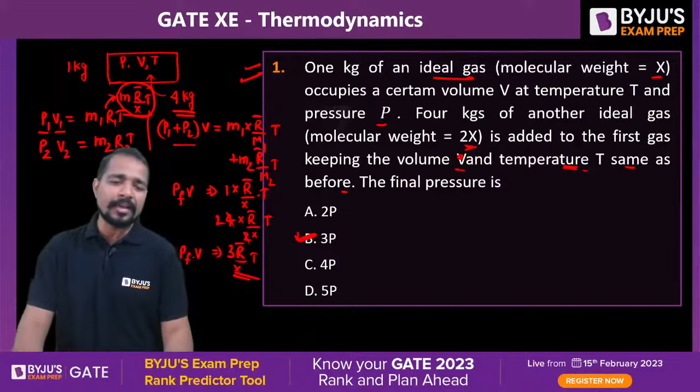So if I compare both, then P1 is this value, my dear, and P final is this value. It is clearly visible that 3P is the answer. Are you getting my point? If I compare this and this equation, we are correctly getting that P final will be exactly equal to 3 times the P initial. Answer will be 3 times the initial pressure. Yes, absolutely. Hemang, your answer is absolutely right.

Srot, Ajay, these are a little bit twisted questions. You must write the answer. Okay. After that, very easy question. Internal energy of a thermodynamic system is defined by, write the correct answer, my dear. Hemang, Ajay, Srut, fast. The internal energy U of the system is defined by, Hemang says B, that is the first law of thermodynamics. Anyone else, Srut? What is your answer, Ajay?

Yes, absolutely right. First law of thermodynamics, yes, because it defines the internal energy as a property of the system. So up to 9, these are the 1 mark questions.

In the polytropic process, described by PV raised to n is equal to constant, what if the value of n becomes 0? Then the process is known as, means slope becomes 0. Line is horizontal on PV diagram because n, means slope, is 0, my dear. So what will be the answer? Can you please tell me? Very good, very good. Yes, nice. Isobaric process, clearly visible to us.

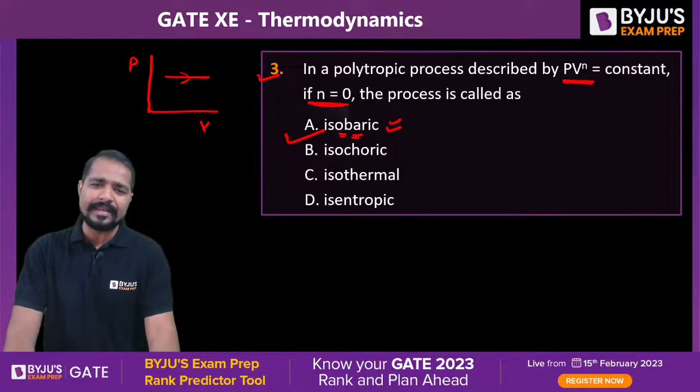If you perform a little bit better, my dear, you can get the rank under 100. Under 50, you can get the rank. Yes. Just you need to write the answer. Top 9 questions of SOM first, if you are going to attempt SOM, and top 9 questions of thermo first, because these are the 1 mark questions and very easy questions, my dear.

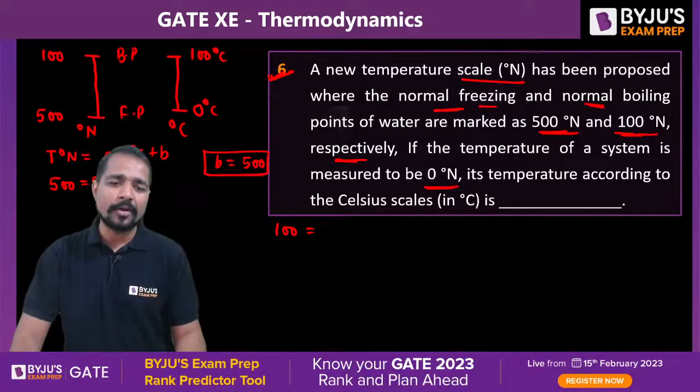We can write it like this: N = A°C + B. When this measures 500, this will measure 0, my dear. That's why the numerical value of B, I can write as 500. Absolutely right. After that, when it measures 100, this will also measure 100. That is, A is equal to minus 4. Okay. After that, I'll just substitute all the values.

Good. This is N = -4°C + 500. At this 0 value, 0 = -4°C + 500, so we can simply write that T will be equal to 125 degree centigrade. Absolutely right. Sruth, your answer is absolutely right. Hemang, right, and Ajay, your answer is also right, my dear. Next question.

Question number 7, again a 1 mark question. A thermodynamic process for a substance is represented by constant pressure on the PV diagram and constant temperature on the TS diagram. Which of the following processes are we talking about?

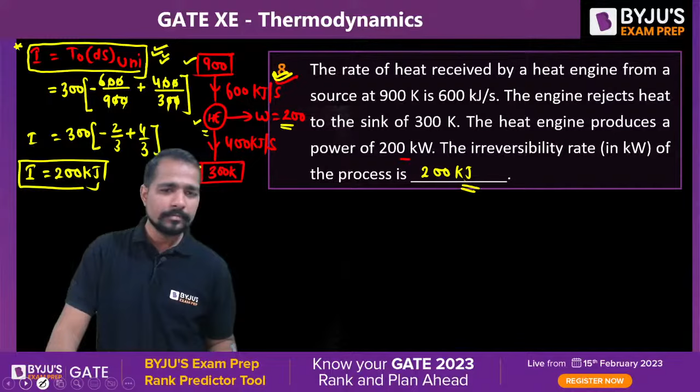Let me tell you, my dear, this time GATE mechanical gave you a little surprise. Questions were not asked from the usual topics in thermal. Generally, in IC engine at least one question is asked, and from the Rankine cycle, steam turbine or compressor, one question is asked. There was no question. Weightage was a little less than expected, but it is not going to happen in ESE. Reason: 22 questions are fixed in ESE. If 22 questions are to come, they will come. So you won't be let down, because when few questions are asked from subjects like thermal, theory of machines, strength of materials, you feel a little bored, since we study these subjects in great detail.

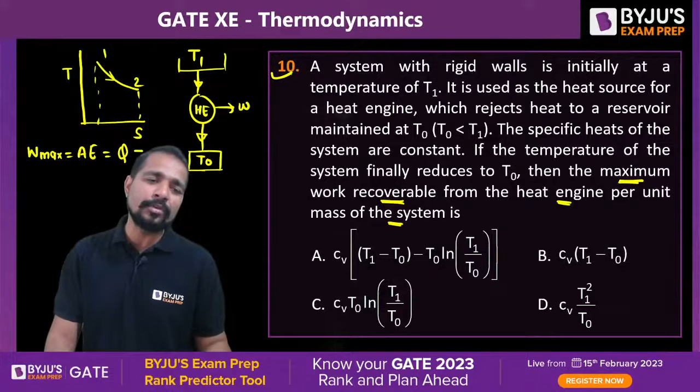So in this case, we are very much aware that maximum work done is nothing but available energy, that is also nothing but heat supply minus T0 into ds of the system, my dear. Are you aware of this or not? Heat supply Q minus T0 into ds. So again the wall is maintained at T1, atmosphere is maintained at T0.

What is the numerical value of the Q? You must know. Can we write from here that the numerical value of Q per unit mass will be equal to CV into T1 minus T0? Not the correct answer, not the correct answer. Either B or A will be the correct answer. Hemang. Now after that, what is the change of entropy of the system? I mean, what is the change of entropy of this wall?

Can we write the wall is a finite body? Wall is a finite body, so ln T1 divided by T0. This is the change of entropy of the system. Direct answer, you can easily check this, my dear. Otherwise, you can solve the same problem with the concept of entropy change in a reversible cycle. In the reversible cycle, change of entropy, answer is absolutely A. Yes.

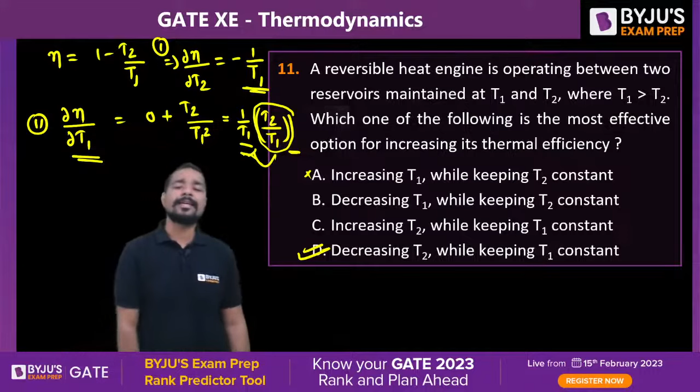So that's why increasing T1 is not good. If you are talking about the most, decreasing T2 is the best thing. D is the correct answer. Ashutosh, absolutely. Is your point clear, my dear? आपका एक छोटा सा doubt था. Is this point clear to you? Good. Let's come to the question number 12.

Wonderful. Ajay, maximum of you will make the mistake in this question. Even the question is very easy, but maximum of you will make the mistake. This is NAT type question, my dear. Bilkul, because question number 12 we are going to discuss. 10 more questions are left, my dear. After that, Dheeraj sir is coming with the strength of material. 22 questions we are going to discuss in today's class from thermal. 22 plus questions will be discussed in the same class related to strength of material.

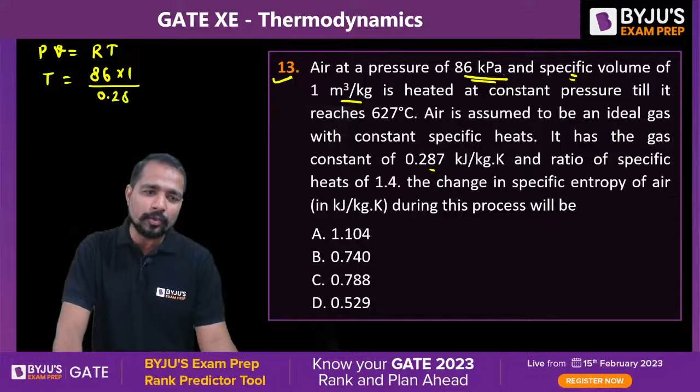P is given, specific volume is given, R is given. Then from the ideal gas equation, PV is equal to RT, or temperature will be equal to 86 into specific volume 1 divided by R, that is 0.287. That is the value of temperature in Kelvin. After that, the change of entropy is equal to Cp into delta T, or it is equal to gamma into R divided by gamma minus 1 into delta T, where delta T is T2 minus T1.

So you will substitute all the values. 1.4 into 0.287 divided by 0.4, T2 is equal to 627 plus 273, that is 900 minus what T1 we have got. हमारा T1 कितना आया था? What was the value of the T1? Can you please write the answer? 86 divided by 0.287.

299.65, yes, 299.65, then we get the answer A. Absolutely right, that is 1.104 is absolutely right. Good, wonderful.

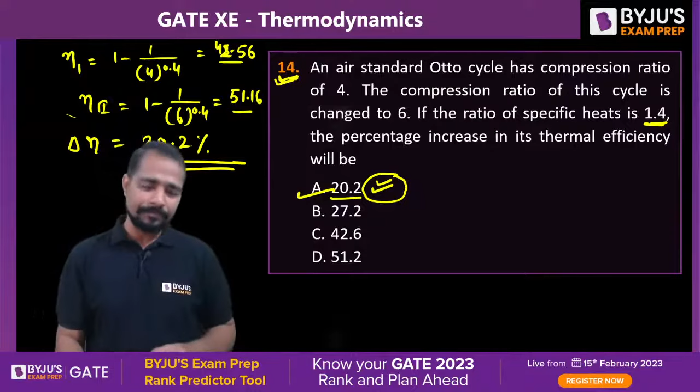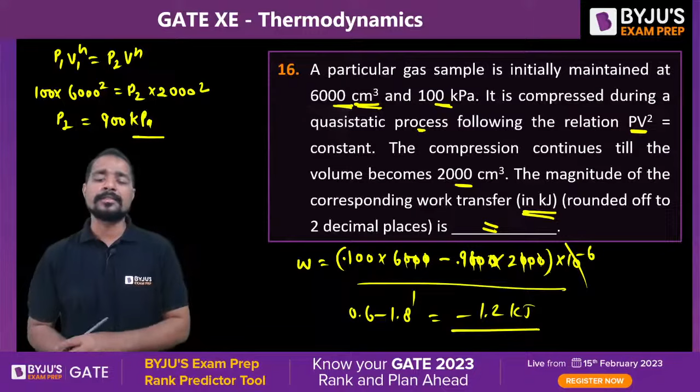Next, a little bit tricky question for you, my dear. Let's see how many of you are getting the answer in this case. Maximum of you are not able to solve this question.

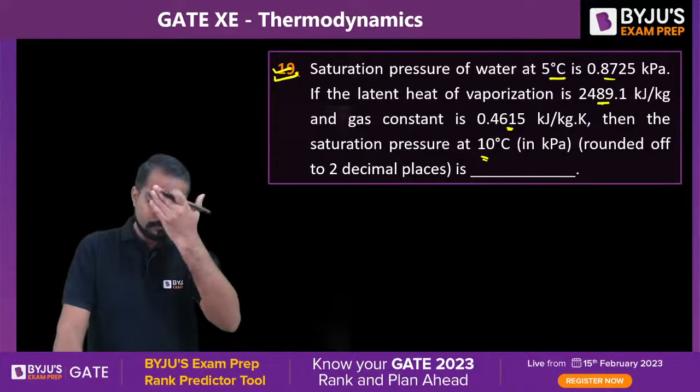Are you aware with the Clausius-Clapeyron equation? Okay. Anyone?

We are also having two formulas of the Clausius-Clapeyron equation. Are you solving it? Should I give you the time? Are you solving now?

Very good, great. 1.2292 is the right answer. How, sir? We know very well.

When we write the differential equation in the integration term, that is completely written by latent heat divided by R, times 1 by T1 saturation minus 1 by T2 saturation. All the values are given: latent heat of vaporization is given, sorry, T2 by T1.

Vaporization is given, what is P1? Where is P1? This one: 0.8725. Have you solved like this, Hemang?

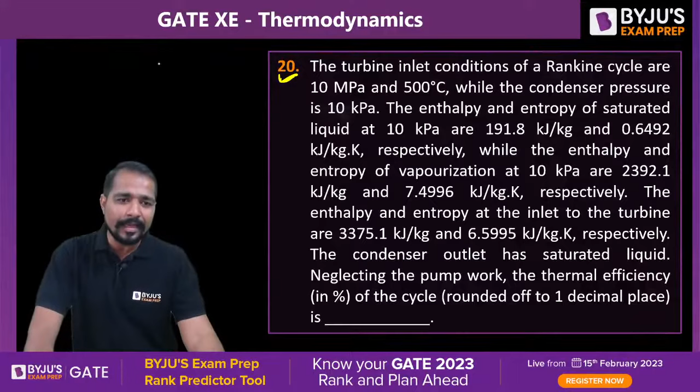This question is little bit lengthy when you will read, but again when you will solve it, it is quite easy. The turbine inlet condition of the Rankine cycle is given as 10 megapascal and 500 degrees centigrade. Very good, if I'll draw the TS diagram, then let's see what exactly this question says.

Inlet condition is 10 megapascal and 500 degrees centigrade. The condenser pressure is also given to us. So this is the condenser pressure and this is the turbine pressure, or the boiler pressure we can say. The enthalpy and entropy at 10 kilopascal is also given to us.

This one, respectively. The enthalpy and entropy of the vaporization at 10 kilopascal is given to us like this and this, respectively. The enthalpy and entropy at the inlet of the turbine is also given to us, this and this, respectively.

Condenser outlet of the condenser is saturated liquid, meaning this point is very clear to us. Outlet of this one, then condenser outlet, neglect the pump work, find the thermal efficiency. What we need to do, my dear, in this case...

1 to 2 is the boiler, 2 to 3 is the turbine, 3 to 4 is the condenser. So what we need to do, first of all, we need to find the work done of the turbine.

Is it or not? First we need to find the work done of turbine, that is H2 minus H3. After that we need to find heat rejection in the condenser, that will be equal to H3 minus the value of H4.

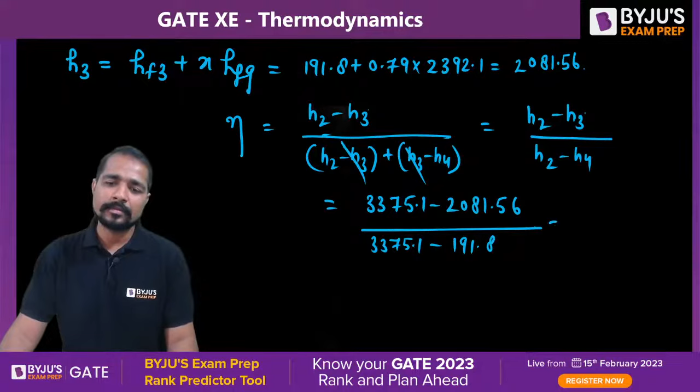What is the value of H2? H2 3375.1 minus H3 2081.56 divided by H2 3375.1 minus H4 191.8, percentage efficiency. Now tell me the answer. So these small mistakes can create a lot of problem for you, my dear. 3375.1 minus 2081.56 divided by 3375.1 minus 191.8 is the right answer. 40.64 is the correct answer. Good, absolutely right. Move forward.

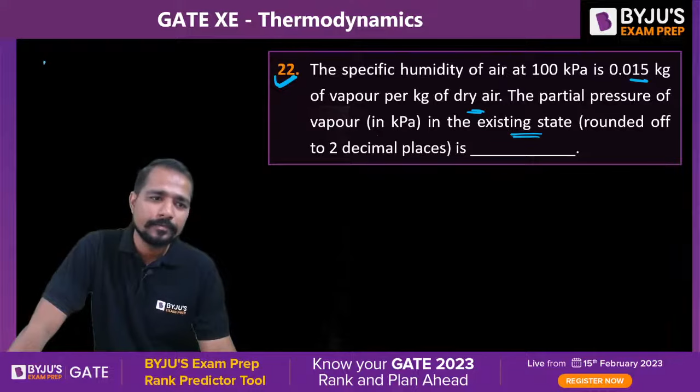Okay. Specific humidity. This one is given to us. That is 0.622 PV divided by barometric reading minus PV. These type of questions are asked in the exam. This question I have directly taken so that you can get the idea कि हमको यहाँ तक wait करना है. Sometimes in the last, my dear, few important and easy questions are there. So what is the specific humidity? That is 0.015.

0.622. Vapor pressure I need to know. Barometric reading is 100 kilopascal minus PV. Can you please tell me the answer? If I just multiply this, okay. Yes, Ajay. 1.5 minus 0.015 PV will be equal to 0.622 PV. So PV times 0.637 is equal to 1.5. From here, what is the value of PV? Write the correct answer fast. 1.5 divided by 0.622 plus 0.015. That is 2.354 is the correct answer.

He is asking you what? The vertical reaction. So if this is point A, this is point B. He is asking you RA, which is equal to RB by symmetry. What will be that value? Manas, answer is B. Ajay is saying answer is B. Yes, guys, the answer for this is B. I already told you that if you have 5 pi x by L, the answer is going to be W into L upon 5 pi. And I told you this is valid only if N is odd. What is N? This value. If this is odd, this formula is valid. I told you this as a shortcut.

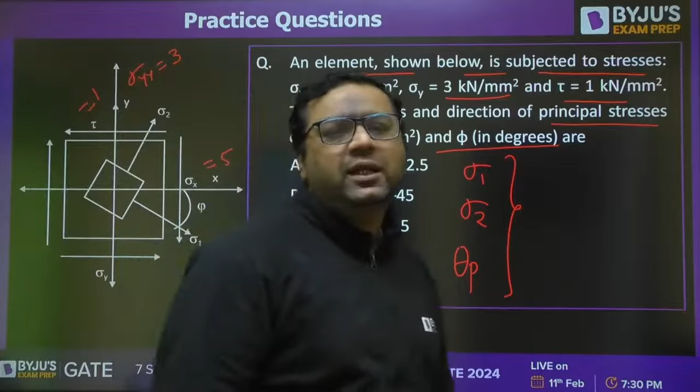Sir, we have only free vibration in solid mechanics, right? Yes, Manas, we are having free vibrations, and that also single degree of freedom system. And you are also having engineering mechanics. But I have kept only strength of material questions in this. So there is engineering mechanics plus SOM plus vibration. I am going to take a separate session on Friday. On Friday, I will be taking 22 questions from these three, based on the requirement of the paper. So be ready for that.

Solve this question, guys. You need to find out sigma 1, 2. You know the formula for sigma 1, 2 as sigma xx plus sigma yy by 2, plus minus the square root of (sigma xx minus sigma yy by 2) square plus tau xy square. Solve it and get the answer. Manas is saying the answer is B. What about others?

There is no such fixed distribution. There is no such fixed distribution. Okay, but yes, the major part is SOM. You can say 60 to 70% will be SOM.

Okay, the success is also saying B. Okay, guys. Shrut is also saying B. Okay, why not A? Why not A? Do you remember the formula? I feel you forget everything. Dear, that's correct. Sigma 1, sigma 2 values you have calculated very easily.

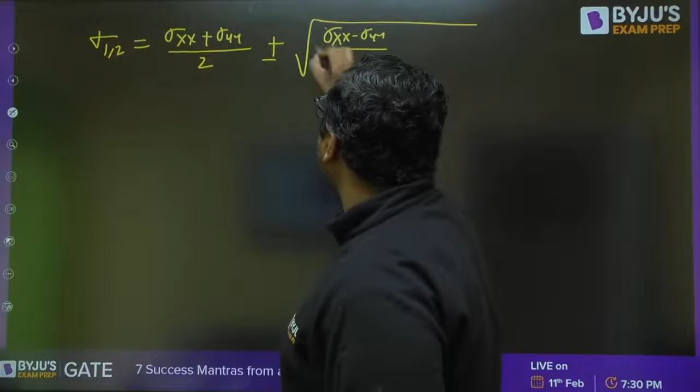Sigma xx plus sigma yy by 2, plus minus square root of (sigma xx minus sigma yy by 2) square plus tau xy square. This will give you the value of sigma 1 and sigma 2. And you will be getting the values 5.41 and 2.58. 5.41 and 2.58. That is correct.

Then you will be finding out tan 2 theta p, that is tau xy by (sigma xx minus sigma yy by 2). If you see here, shear is like this. Okay. So this shear we will consider as negative shear. When you consider it as negative shear, you will be getting 2 theta p as minus 45 degrees and theta p will be 22.5.

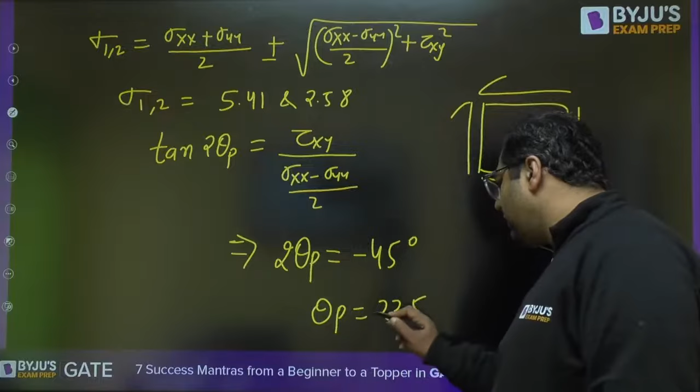Yes, and because of that kind of mistake, this option was given. A is the correct answer. So this type of mistake you have to be aware of, and you need to avoid and eliminate these kinds of things. Otherwise, marks will be deducted.

Moving to the next question. This is from SFD BMD. It is a wonderful question, guys, and this is MSQ. Try to solve it. This is UDL, UDL in the entire beam. First of all, find out the support reactions. Then I will tell you SFD BMD also. Now we are very much prepared for SFD BMD. Very easily you can make it.

This type of question is very good. When you find out the support reactions, this is RL, this is RM. This is an overhanging beam. You need to apply the conventional procedure, that is RL plus RM equals total UDL, 1500 for a length of 2 meters, 1500 into 2 newtons. This is one equation. Then take summation of moments about L equal to 0 and find out the values of RL and RM. You have to do the calculations.

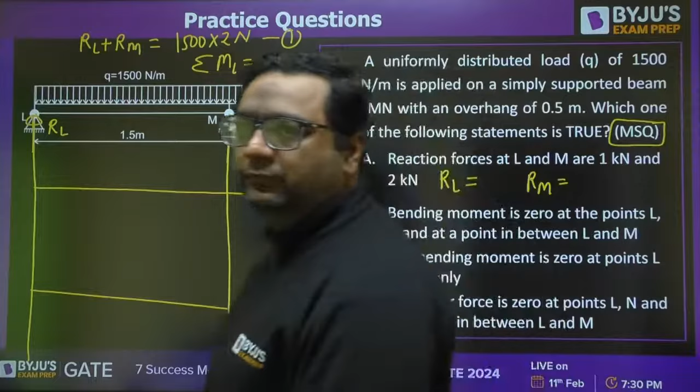Yes. This is MSQ, so more than one option can be correct. Okay. Hemant, Manas, Ajay, Shruth, try to solve it. Just find out the support reactions. Then I will help you.

Okay, Manas is saying A is correct. Means you have calculated the support reactions. Yes, that is correct. When you find out RL, it is coming out to be 1 kilonewton. RM will be 2 kilonewtons. That is correct. Very good, Hemant. Very good, Hemant. बहुत ही बढ़िया.

Now, my dear, for the other options, you need to make the shear force diagram and bending moment diagram. Once you get these values, you can very easily make SFD and BMD. How can we make it? Let us see. First of all I will take a section and consider the left hand side of the section. This is positive shear force, this is negative shear force. So positive means we will have an upward jump of 1000 newtons. So this is going to be 1000 newtons.

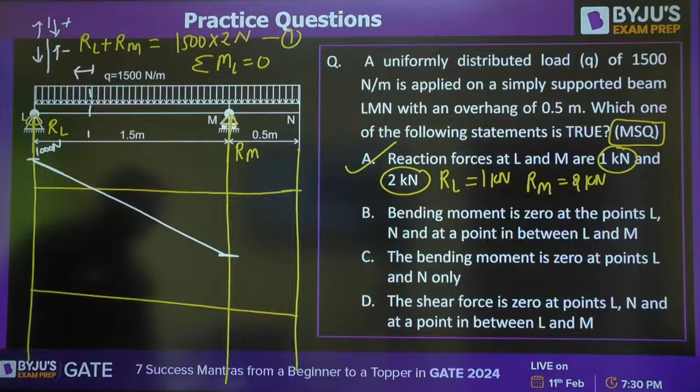Then after that it is a UDL. So for UDL the SFD will be of this shape. And it is for 1.5 meters, 1500 into 1.5. So you will be reaching some point here, and after the calculation you will be getting minus 1250. Then there is a jump of 2000 which will make you reach 750. And then you will have this. Sorry, this. I feel everybody got it. Some of you have already given the answer also. This is going to be the SFD.

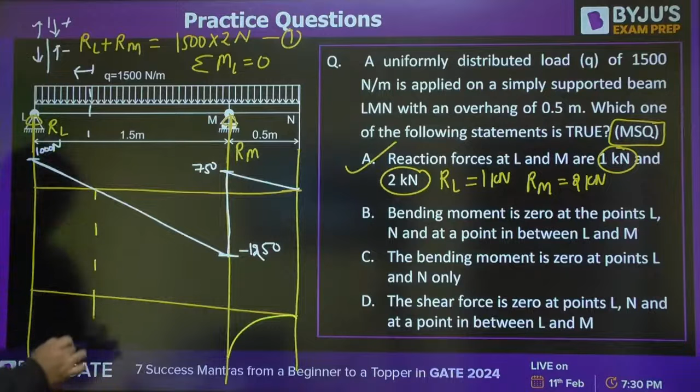Now if we are making the bending moment diagram, my dear, you know how the bending moment diagram will come, as it is creating hogging. So it is an inclined line. I will have a parabola, and that parabola will be of this shape. Why? Because the magnitude of shear force is increasing. And here the bending moment will be maximum. So this is going to be the BMD. Bending moment is 0 at this point, 0 at this point, 0 at this point.

Okay? Yes. So the answer will be, let us see. Bending moment is 0 at the points L, N and at a point in between L and M. The bending moment is 0 at point L and N only. The shear force is 0 at point L and N. That is wrong. So the answer is A and B. Ajay, why did you change? The answer will be A and B.

Okay. Yes, Manas, you got it. Hemang, you got it. Manas, Hemang, Ajay, Shrut, Concept is the success. Please tell me. Yes, please tell me, guys.

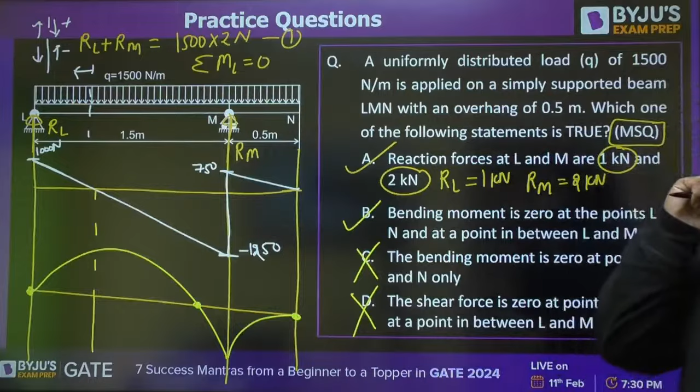Moving further, guys. Next question. You can see this type of question was also there in the mechanical paper.

Okay, guys, if any one of you wants to talk about the paper with me after this session, you can talk to me. Like Manas, I didn't get anything from your side about the paper. Ajay also. Shrut, I have already talked to.

Hemang, you also. So the true stress at fracture of a tensile tested specimen having an initial diameter of 13 mm. This is true stress, 700 MPa. If the diameter of specimen at fracture, means final diameter, then the engineering stress. So you know engineering stress is defined as force upon pi by 4 d naught square, whereas true stress is force upon pi by 4 df square at the fracture, because we are knowing the value at fracture point.

So at fracture point this is going to be the value. This is given to us as 700 MPa. From this you can get the value of P. Put this value here, you will get engineering stress. So this is a question from the stress and strain diagram. Solve this and let us see how many of you give the right answer. This is our question number 5, and we are going to do 22 questions.

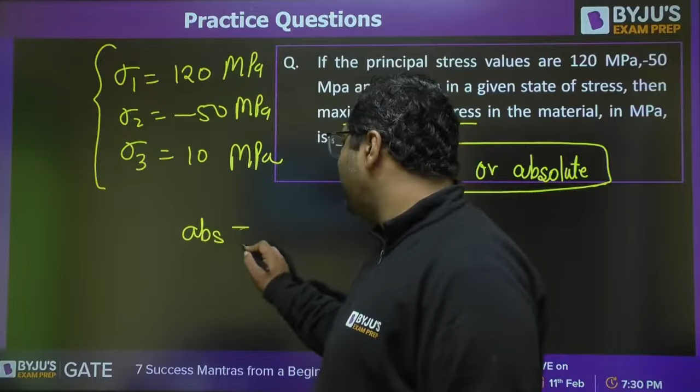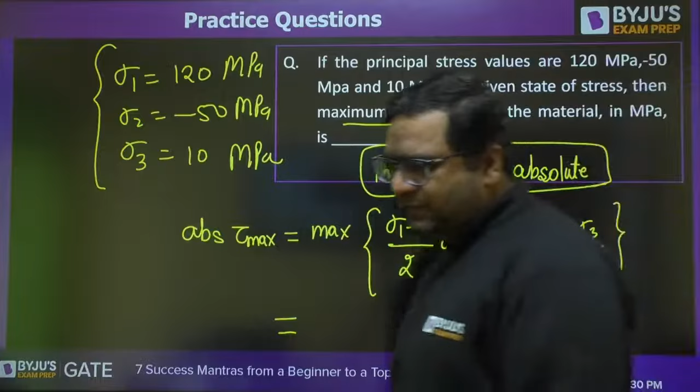Yes. Obviously absolute. So guys, you need to find out absolute tau max. Find it out, you know the formula for that. So I have taken this question just to remind you about absolute and in-plane. Okay. Tell me the right answer. So the answer is one value out of these three. The maximum is 85. 85 MPa. Okay. Very good, guys.

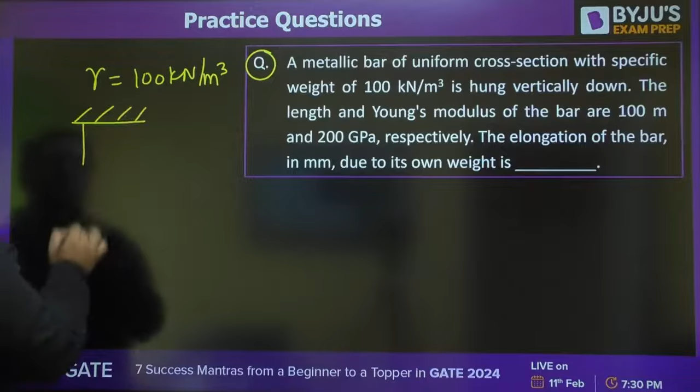Next question, guys. Question number 6 is a metallic bar of uniform cross section with specific weight gamma, 100 kilonewton per meter cube, hung vertically down. The length and Young's modulus are given. Elongation of the bar. Okay, this type of question you have seen in GATE mechanical also. He is asking about elongation of the bar, so you need to find out the elongation of the bar.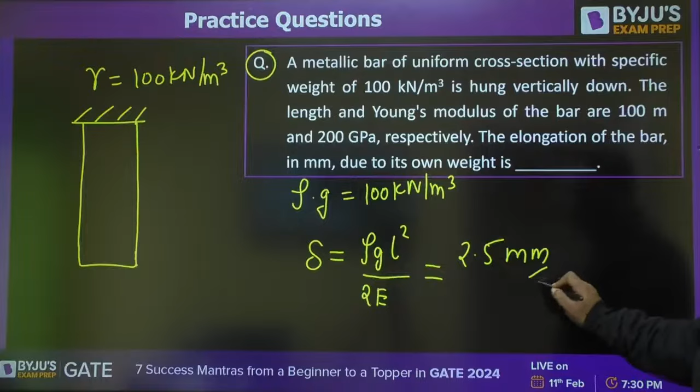Okay, so you need to integrate because of self weight. Self weight increases when we go from bottom to top. That is why. Okay, fine. Very good, Hemang. Very good, Ajay. Moving to the next question, guys.

This is the next question. A beam is loaded as shown in the figure. The bending moment in newton meter at point R. You need to find out the bending moment at this point. For that you need to see the effect of this 10 kilonewton by adding 10 kilonewton downward and 10 kilonewton upward. These will be making a couple like this. Then this force has two components, one downward, other upward. This is 6 sin 30. This is 6 cos 30.

Using this principle of superposition, you will be finding out the support reaction at S, support reaction at P. After getting it, the bending moment at R can be written as RS into this distance 2 meters. That will be your answer, because you know bending moment at a point or section can be seen either from left or from the right hand side of the section. So guys, just solve it and get the answer.

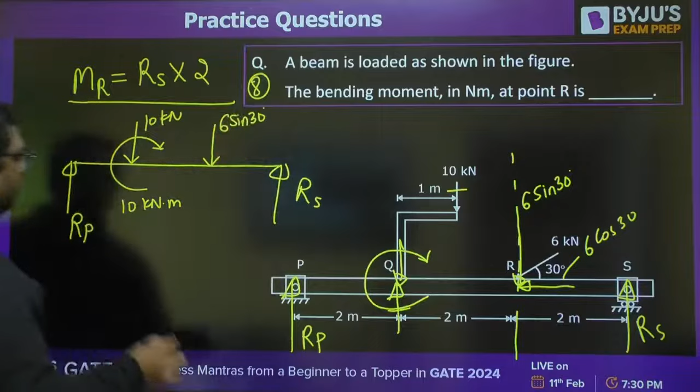If you see the beam, this is RP, this is RS. Here there is a force of 10 kilonewton and a moment of 10 into 1. On the other hand, there is a force, 6 sin 30. You will find out the support reaction at P and support reaction at S.

What you are getting, guys? Anybody? You will get this to be 7 kilonewton, this to be 6 kilonewton, because this is 3, so 10 plus 3 is 13.

Very good, guys. So after getting these values, you will be getting the bending moment at R to be 7 into 2, the value is 14. And if this is in kilonewton, distance is in meter, he is asking in Newton meter. Take care of this also in numerical answer type questions, units, otherwise you will lose the marks.

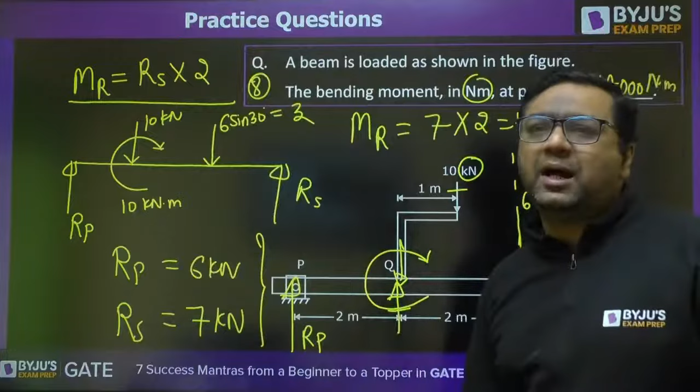Yes, so moving further, guys, to the next question. Sanjay, here we are having all levels of questions because in exam you are not getting all questions difficult, so we need to take care of all.

Minus the answer, okay, are we talking about this? The answer is not 0, the answer is 14, because what he is asking is bending moment at R. What is bending moment at R? This force into this distance. Remember, bending moment is force into perpendicular distance. So either you will see to the right hand side or you will check from the left hand side. Bending moment at a section is defined as the algebraic sum of all the moments either to the left or to the right hand side of the section. So you need to take either left or right.

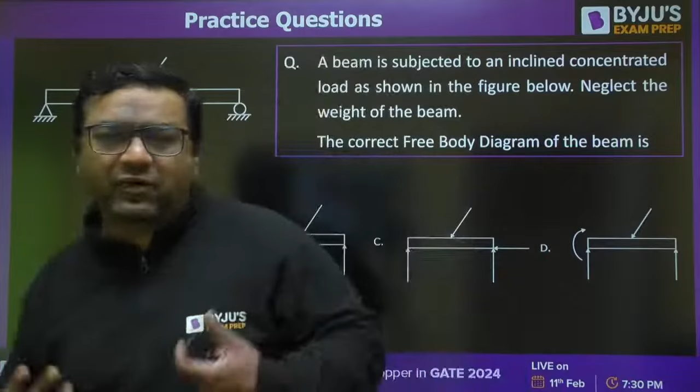A beam is subjected to an inclined concentrated load. Neglect the weight of the beam, find the correct free body diagram. This is very easy question, but this was asked in XE 2 times, that's why I have taken it. This is very easy, you just need to see which support gives which type of reaction. So answer will be B for this.

Now, this is a good question. A bar of rectangular cross section of area 50 mm square is pulled from both the sides by equal forces of 100 Newton. The shear stress is in MPa. So he is asking shear stress at this place. Let us see how many of you are able to do this.

Solve it, guys. This is question number 9, sorry, 10. Question number 10.

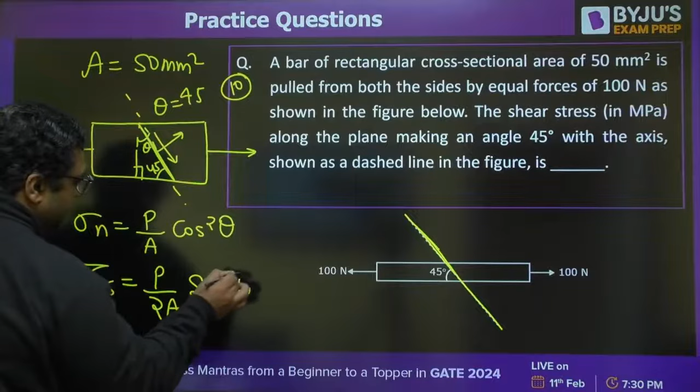So if we are going to have this, what is P? P is 100, divide by 2 into 50. And what is sin 2 theta? Sin 90, which is 1. Answer will be 1 Newton per mm square.

Moving further, guys, once again from SFD BMD topic. This is the cantilever being given, but here they are asking you about the bending stresses at point P. You need to answer the bending stress value at P, so first you need to find out the bending moment at P.

After getting the bending moment, bending stress is M y max upon I NA, since it is having a rectangular or square section. You need to tell this at P only. Here y max applies because the section given is a square section, so I NA is A^4 by 12, and y max is A by 2. Use this expression and give the answer.

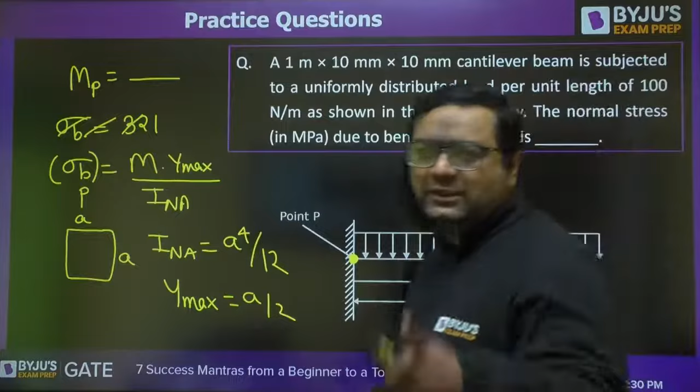We considered it in this way only. In uniaxial loading, when we derived it, we took it this way. What you are saying about counterclockwise was in the case of combined loading. Forget about that.

Find out the normal stress at point P. This question I have taken to tell you a very important point which students do wrong in the paper. Just solve it, guys.

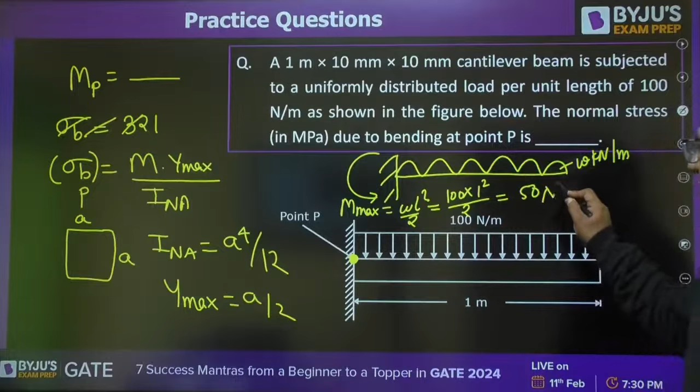This is in Newton meter. Now the area is given as 10 cross 10, so 50 into y max, which will be 5, and I is A^4 by 12, that is 10^4 by 12. This will give you the value of bending stress.

Ajay is saying the answer to be 0.3. What about others? I feel the answer will be coming out to be 300 MPa. Are you getting 300 MPa?

Dear, you forgot that this is in Newton meter, so you didn't multiply it with 1000. This is mm^4 and this is mm, so the meter needs to be converted. Because of that, you need to multiply it with 1000, which you forgot, Ajay. So when you multiply by 1000, the answer will be 300 MPa.

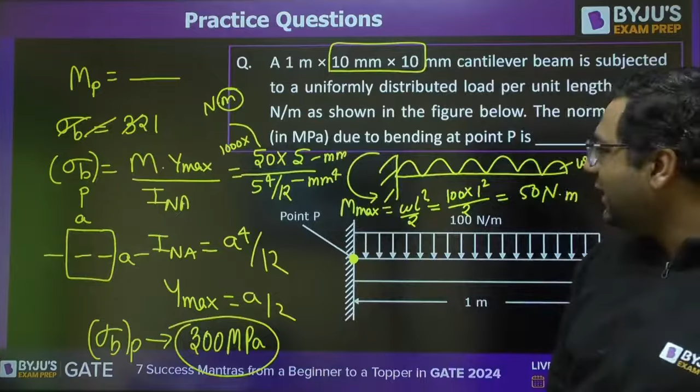But here is the twist. No doubt, those students whose fundamentals are correct, who take care of the units, will reach this answer. But if you look at the loading, can you tell if it is sagging or hogging? If you see, the beam is going to deflect like that, so it is going to be hogging.

For hogging, this fiber is in tension, so the answer will be plus 300. So you also need to take care of whether it will be plus or minus.

So if the loading is downward causing hogging, compression will be here, tension will be here. If they ask here at Q, the answer will be minus 300. That kind of twist can be there in the question.

Very good. Moving to the next question, guys. As I said, all types of questions will come: easy, moderate, difficult. A 300 mm long copper wire of uniform cross section is pulled in tension.

Pulled in tension, so that a maximum tensile stress of 270 MPa will come within the wire. The entire deformation of the wire remains linearly elastic. The elastic modulus of copper will be 100 GPa. You need to find out the resultant elongation in mm.

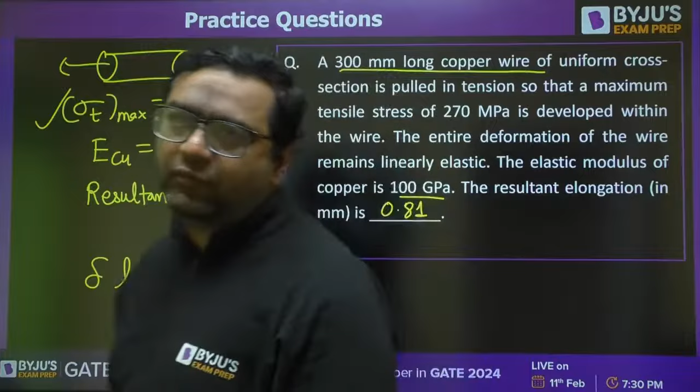This is just to confuse you, nothing more than that. Next question will be from Mohr circle. We have completed 12 questions. Very good, the answer will be 0.81. So you can see the last question was slightly moderate type. This one is easy, next is from Mohr circle.

Yes, Manas, are you there or not? This is from Mohr circle. This time I will not help you, solve it.

Yes, it happens often, like this time the question was related to engineering ultimate stress. Even I had not seen for the first attempt whether true stress is given, because the data I got was in the raw form. So that is why these kinds of mistakes happen in the exam.

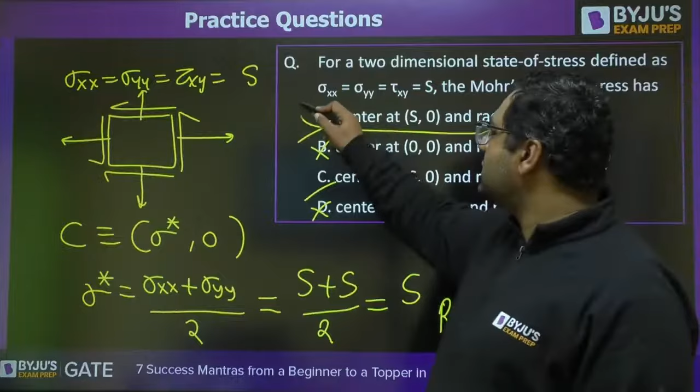Then radius. For radius, what do you need to do? Radius is tau max actually. So what is tau max? Sigma xx minus sigma yy by 2, square, plus tau square. The answer will be S again. So the answer will be A for this. A is the right answer.

Okay, moving further, next question guys. This is from theory of failure. This is our question number, I believe 14. Question number 14 of SOM: a specimen of steel has a yield strength of 700 MPa.

He is saying principal stresses are equal. Now you need to find out factor of safety from MDET. Just solve it and get the answer.

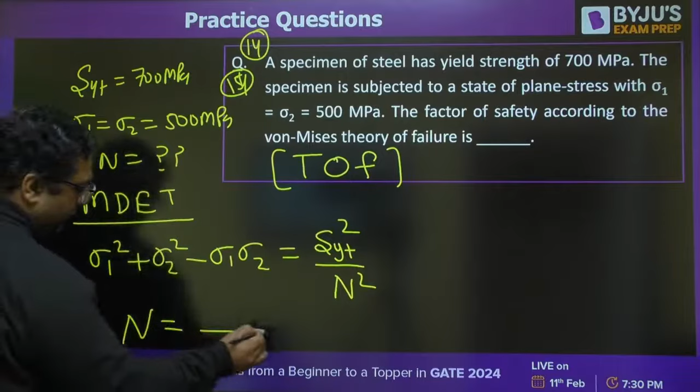Okay, Hemang is saying answer is 1.4. Manas is also saying the answer is 1.4.

Moving to question number 15 now. A square cross section wooden column of length 3140 mm is pinned at both ends. For the wood, Young's modulus is 12 GPa and allowable compressive stress is 12 MPa. The column needs to support an axial compressive load of 200 kN. Using a factor of safety of 2 in the computation of Euler's buckling load, find the minimum cross-section area required.

This is a question from column. You all know that the formula for buckling load is pi square EI minimum upon LE square. Since they have given a square section, you will write that the load at support should be less than or equal to the buckling load divided by factor of safety. So they have given 200 kilonewton less than or equal to pi square EI minimum upon L square. Factor of safety is given to you.

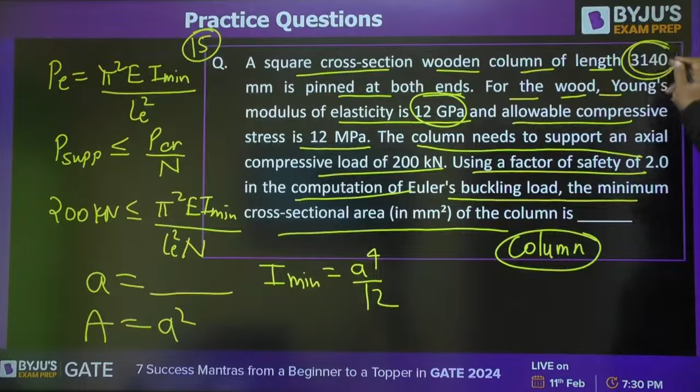Everybody, E is given as 12 GPa. Okay, length is given as 3140. It is mentioned pinned at both ends. It is mentioned pinned at both ends. Okay, Ajay, this is the value for what? Is this the value for area? Is this the value for area, guys?

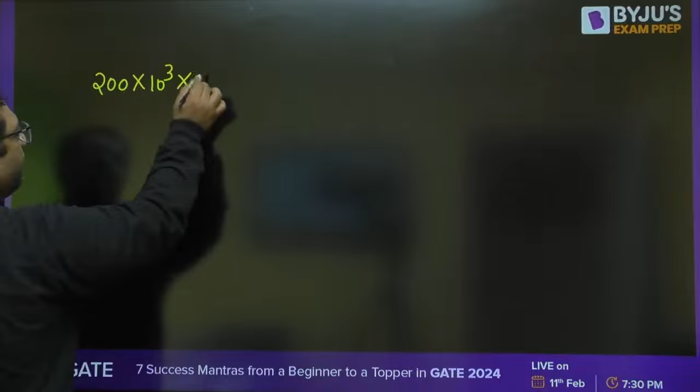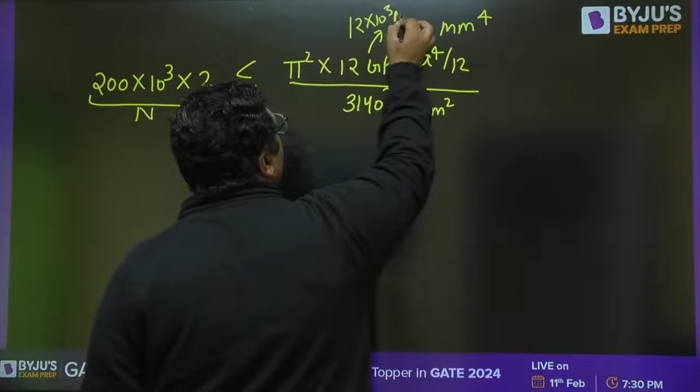Okay, how will you do this? 200 kilonewton means 10 to the power 3. When factor of safety comes here, it will multiply by 2. It is less than or equal to pi square into 12 GPa. I'm writing the units, 12 GPa, then I minimum is A to the power 4 by 12, then LE is 3140. By solving, this is having the units of Newton now. This is mm4, mm square, so it should be 12 into 10 to the power 3 Newton per mm square. Doing this will give you the value of A4, then you can find out A square. That is your answer.

No, Ajay, why 2? When both ends are hinged, it will be 3140 only, no? Entire length will be affected. Okay?

Yes. So guys, the answer will be coming out to be, I feel, actually A4 is coming out to be 4 into 10 to the power 8 mm4. Now find out A square from that. I think you guys have done some calculation mistake. Correct it and tell me the answer.

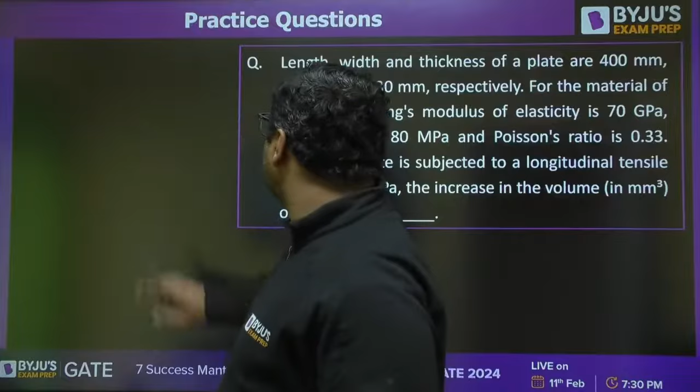This, very good. The answer is 20,000 mm square. That is right answer. Okay, guys. Moving to the next question. This was question number 15.

Very good, Manas. That is in the range. Well in the range. Moving further to question number 16 now. 6 more left. Length, width and thickness are given. For the material, Young's modulus is this. Yield strength is this. Poisson ratio is this. When the plate is subjected to longitudinal tensile stress of 70 MPa, the increase in the volume is, you need to apply the volumetric strain formula.

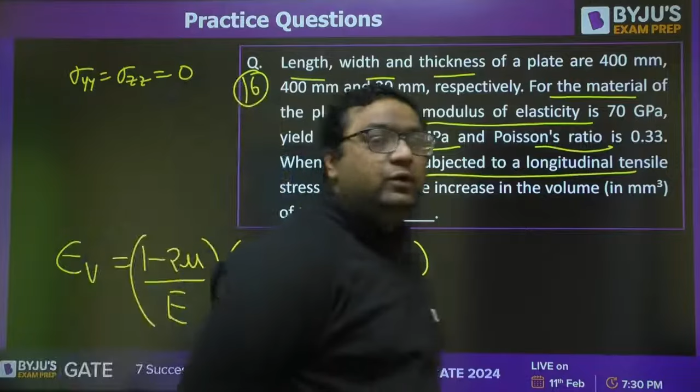Yes, Manas, I understood that. But that kind of mistake here, you need to avoid now. Already one paper you have given for GATE. You must get an idea. These are the mistakes we are doing. So dear, if you will closely see the paper, then you will get to know only 2 to 3 questions were there which you can say were problems. Otherwise, it is just the hype of the paper. Okay? So you need to take care of that.

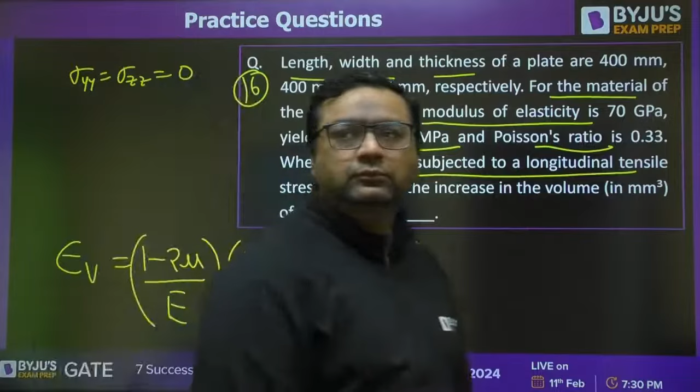Every year this happens. Like in 2019, one question came from thick cylinder, but there was no use of thick cylinder. Okay? Solve it. Solve this, guys. Solve this. No, Hemang. Please check it again.

Poisson ratio is this. Young's modulus is this. Arre bhai, length, width and thickness. This will be the loading. So one dimension will be 400 and one will be 30. Okay, length is 400. I feel you have kept the wrong values. Okay.

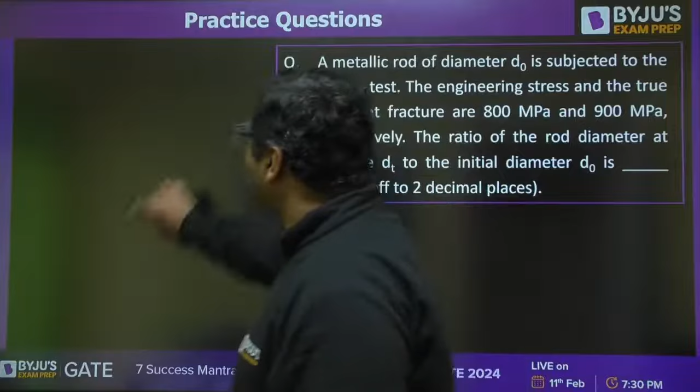Moving further to question number 17. A metallic rod of diameter D naught is subjected to the tensile test. The engineering stress and the true stress: engineering stress 800 MPa, true stress 900 MPa. The ratio of rod diameter dt to the initial diameter.

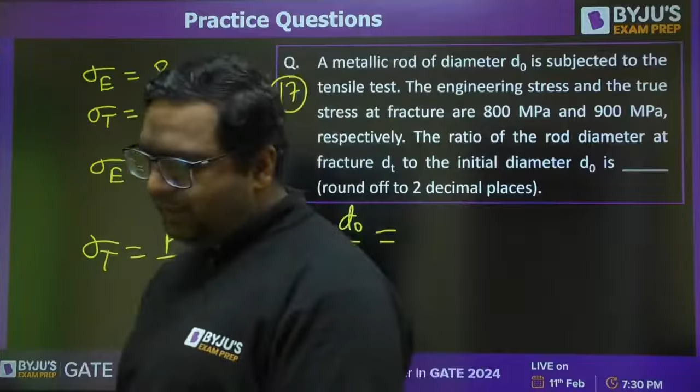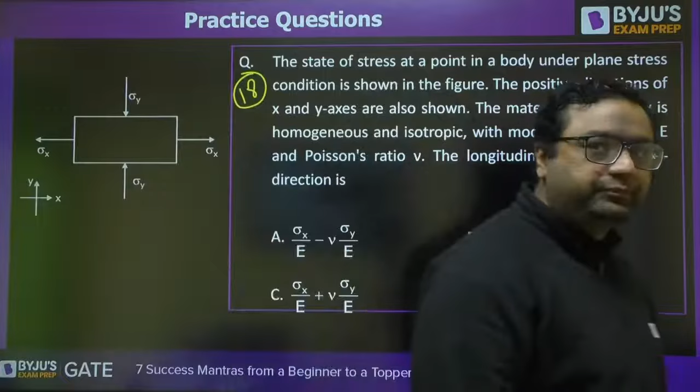Okay, moving further. Question number 18. Which one is correct? So after this, one more question from column. Okay, they were asking final by initial. Sorry. Fine. What about this? What about this? Yes, Ashutosh, Hemant, Ajay, Manas, Teju.

You need to find out the longitudinal strain. That is sigma xx by E. This is the formula. But sigma x is tensile, sigma yy is compressive. So the answer will be C for this. Easy question, but this type of question will be there in exam. This is once again from the column.

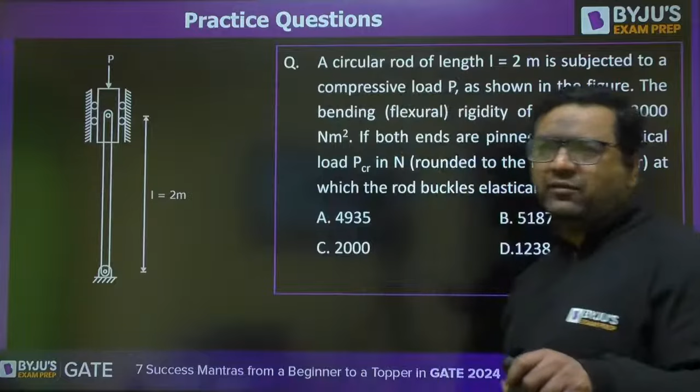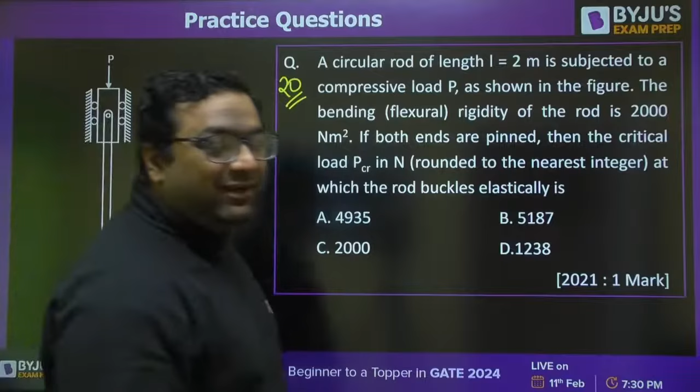So, like whenever I have named production, you can see how Manas was angry on production. So, people are very unhappy with the paper maker. But guys, I have not made the paper. So, I can understand. भरे बैठे मैकेनिकल वाले, इस तरह क्या पूछ लिया ये. But मैंने नहीं बनाया पेपर भाई. And neither I am saying कि whatever they have done is correct. No, actually that kind of paper was not expected.

So, okay. You need to find out the buckling load. Pi square EI upon LE square. Okay? Yes. So the answer will be 4935 Newton. Fine. A is the right answer.

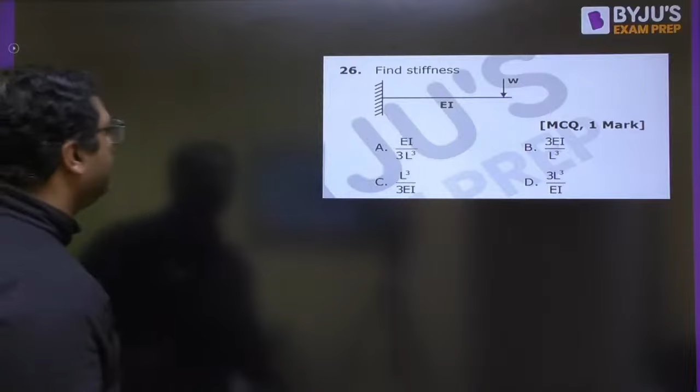So guys, now rest 2 questions I have taken from GATE 23 paper, to cover this type actually. This was the question in which you were asked the stiffness. P was the load, EI was the rigidity. You know that deflection at point A is defined as PL cube upon 3EI. And you already know that stiffness is defined as force by deflection. So to tell you this concept, I have considered this question also.

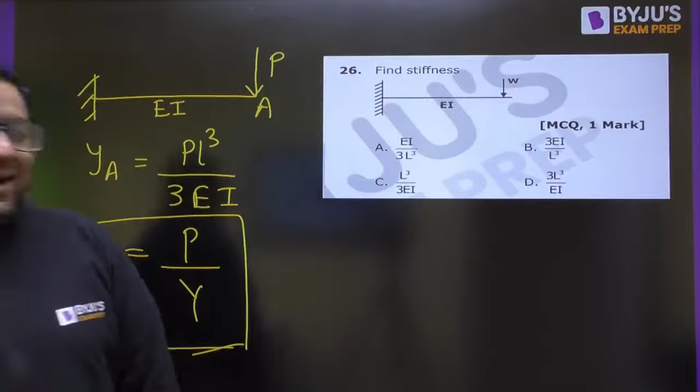Hemant, but from the last 2 years, 22 and 23, they are major ones. Before that, it was not like these 2 years. These 2 years are very, very, you can say, twisting. Okay? Yes, Ajay, that is what I am telling you. In GATE, they are making it in such a way that you will be making the mistake very easily. Even they are making the options like that. That's great, Teju. I was not expecting that. That's what I said. In GATE, making mistakes is very common, very common. Okay. So the answer for this is B. But the problem is, the students who will not make the mistake, they will be the rising stars.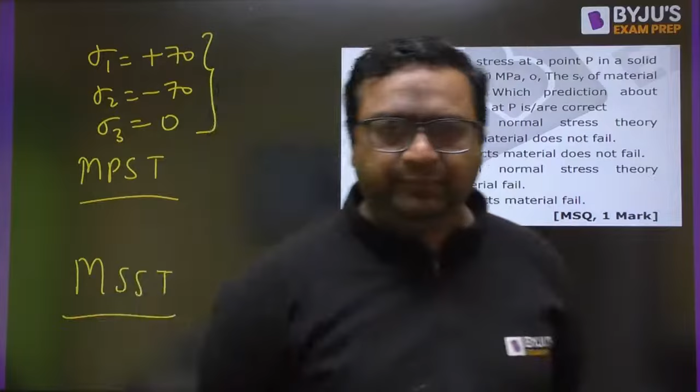That's why for those things only your test series were there. Test series were there to make you prepare for all those things. But definitely, as I said, you guys must get some learnings from this exam. Dear, don't worry. Many students are not able to succeed in the first attempt, but they do wonders in the second attempt. So if you have patience, if you can prepare, if you have all kinds of support, you can prepare well. And still I will say, if you feel your preparation was good but the attempt was not good, then you have engineering services, maybe difficult, BARC not difficult, ISRO not difficult, SPCL can be done. So still you have a lot of opportunities.

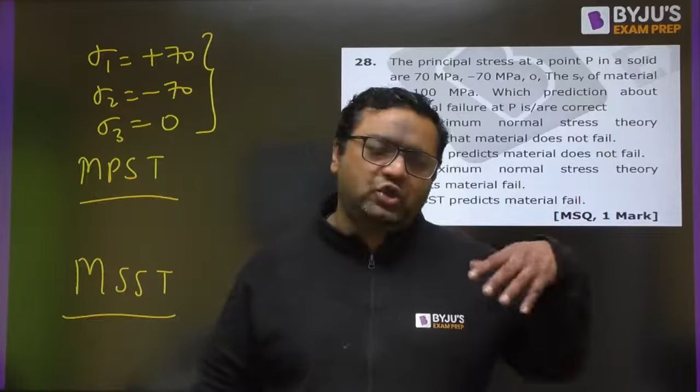So don't leave the preparation now. Work on the learnings. Like you have seen where you are making the mistake, just work on that. In production, if you are facing difficulty, go for it. If in SOM you are facing difficulty, go for it. Okay, so BARC and ISRO are still there. They are very good options.

Okay. So guys, if you see this, when you go for MPST, the yield strength is 100 MPa, so you will say 70 is less than or equal to 100 by n. Factor of safety will come out more than 1, which means the material or component is going to be safe. On the other hand, for MSST, sigma 1 minus sigma 2 is less than or equal to SYT by n. When you do this, 70 minus of minus 70 is less than or equal to SYT by n. Factor of safety will come out to be less than 1. It means fail. So the correct answer is, according to maximum normal stress theory, the material does not fail. That's correct. MSST predicts failure. A and D will be the right answer.

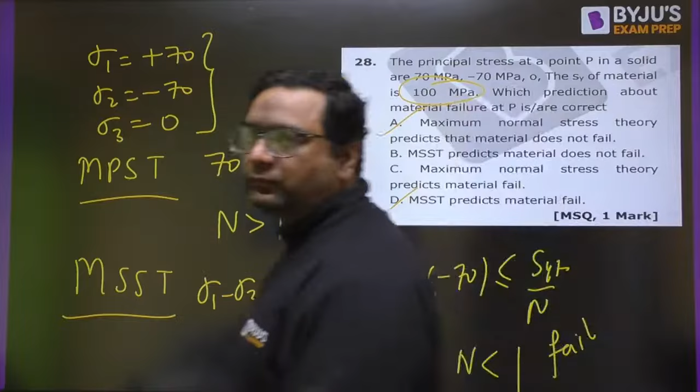Okay. So guys, once again I am saying, don't worry. Give your exam on Saturday. I don't want to waste your time right now. And after your exam, talk to me. Bologe, halke hoge, I will give you some suggestions, because these kinds of things happen. Every exam has some twist. This one also has. These twists may be in favor of some students, maybe not in favor of some students. But this happens. This is a journey, no?

So you can talk to me, you can ask your doubts. I will tell you the majority of the options which will help you. I have a lot of options which you are not aware of, okay? Because I have experience of more than 10 years, there are many students I know who were not able to do well in GATE, but they are right now working in good companies, because there are many opportunities which you do not even know about. So you may be saying, sir, why have you not told us that before? I didn't want it to distract you.

Now you have already given the GATE; appear for this Saturday's GATE. Then I will tell you about other opportunities also, like BARC, ISRO, you know that. There are some others also. For masters also there are some opportunities. Okay. So I will tell you all things. Don't worry about it. Okay. Sir, for PI, what is the minimum score required? Dear, actually it is not like that for minimum score. I feel that if you are coming under top 100 and 200, you have chances in any IIT.

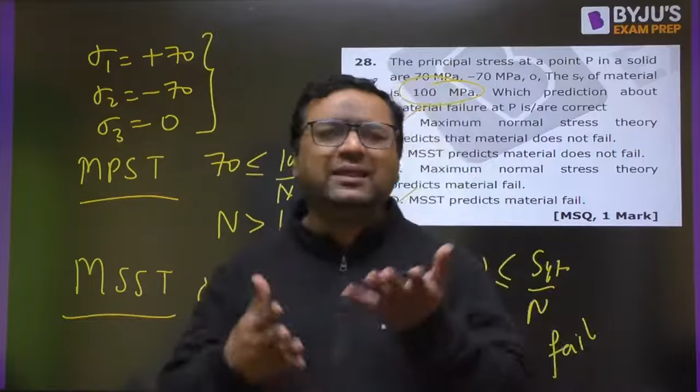Don't worry, for that also I will tell you about the formula that you can see in your admit card also, score card also. That kind of formulas are always mentioned. Okay, I will share it with you. Yes, number of students is something on which it depends. Even minimum cutoff is also something on which it depends. So we cannot predict anything before because it depends on the number of candidates, it depends on the cutoff, it depends on the average marks, that is the total number of marks divided by total number of students. So there are many factors on which it depends.

Thanks. And I feel here, if you see the paper in strength of material, in machine design, in theory of machines, there was no question where you say that, sir, is there any difficulty? They were common only. The difficult things only came in production because of some questions which were not from the portion which every year they were asked. So that can happen. Okay, no problem. And that is for everyone.

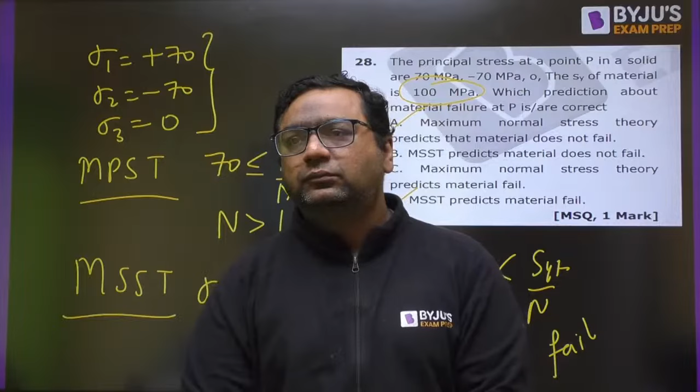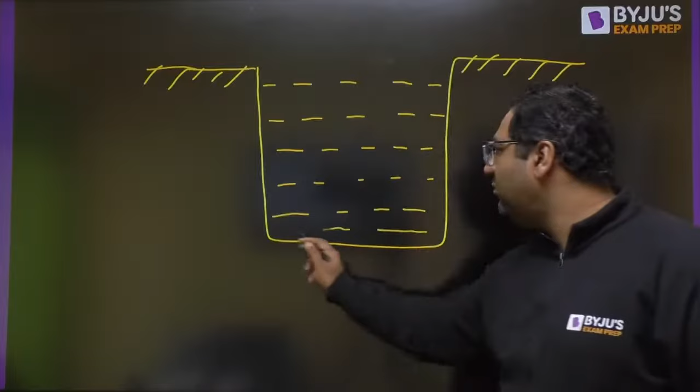But dear, you just tell me whether I have told you or not. The question which was asked in SOM, you all tell me, was that question there in the SOM that I have covered in the class or not? Please tell me that. Have I covered this in the class or not? I have covered this separately or not? You will not find this in notes of any other teachers. Yes, that's what I am saying. There is nothing which was not covered for you.

Yes, you may not have revised everything. You may be thinking it's a crime. अरे नहीं आना होता तो मैं कराता ही क्यों? If I have done it, there are chances. That's why I have done it. Yes, it is less important, but a question can come because it is in the syllabus. Okay, but don't worry, guys.

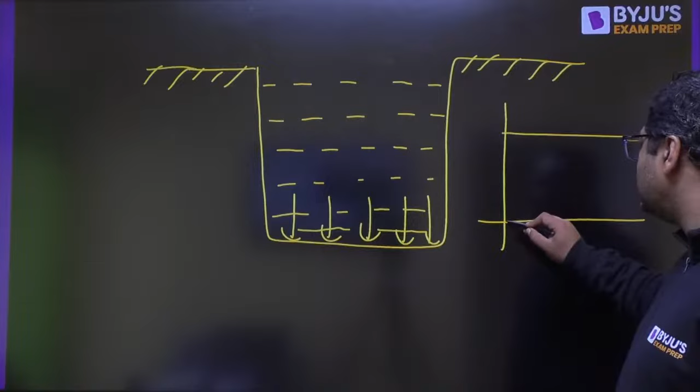That graph was asked, but what is that graph meaning? You know that here the pressure is going to be maximum because of which longitudinal stress is coming. So longitudinal stress is going to be constant at any section. And circumferential stress will increase. At this point, they will become equal. So it was very, very easy.